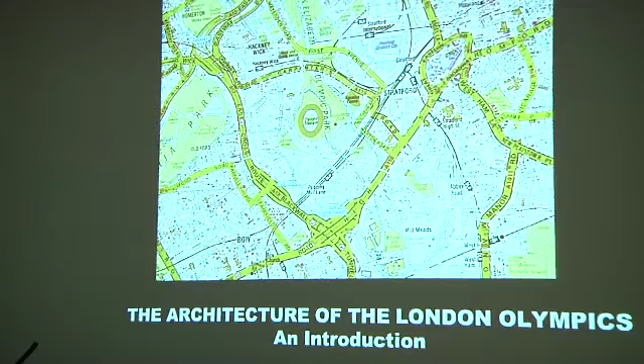It's not by chance that I start talking about the architecture, in inverted commas, of the Olympics, with a slide showing a piece of the A to Z, very familiar to everyone in this room, whether Londoners or newcomers. That immediately says something about the whole approach and what the story is about. The Olympics project in London is about creating a piece of city, and I'll come back to this slide at the very end.

Just notice the site, with all these yellow motorways and things around it - if you half close your eyes, or if you're at the back of the room, it maybe feels a little bit like the rest of London. That's not what it was like about 7 or 8 years ago when this project started.

And that really is the story in a nutshell: how do you go from this to where we are now, to where we might be in, say, 15 years or so from now? If we look carefully at this image, taken around 2005 when the bid was won, you can begin to see one or two really important things which any master planner, anyone interested in making a piece of city, would observe very carefully.

First of all, there's a massive transport hub buried somewhere there - I'll come back to that. Secondly, there's a large area of empty land. That's heaven if you want to develop, right? And with very few residential occupants.

A large amount of industry, which you see in the foreground, but also very importantly, you see way in the back, the Hackney Marshes - a series of green connected landscapes with water running through it, canals coming down, linking further south towards the River Thames. These are the ingredients of this project.

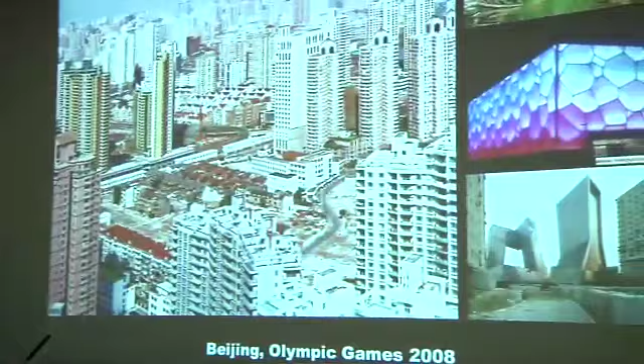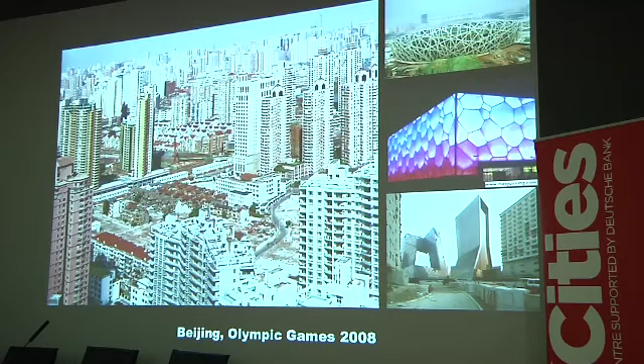And what it isn't is trying to do what Beijing did last time. Beijing needed to put itself on the map at many levels. It hadn't built a major stadium for about 40 or 50 years for 100,000 people, so it got Herzog and de Meuron, one of the best architects in the world, to build the Bird's Nest. But at the same time, they were building things like the CCTV headquarters, in order to make a statement about the new China, the new confidence.

What we also looked at carefully is what not to do. And it's a bit unfair to anyone who is close, as I am, to Greece—they're having a very tough time at the moment. But, you know, to design a Taekwondo stadium only for Taekwondo, very nicely designed, that no one can use after the games, that's what you get: a waste of infrastructure and a waste of investment.

So the idea was not to do that and to choose a site that was well connected and, as Ken Livingstone said, actually needed the money, the 9.3 billion, to actually do something to it.

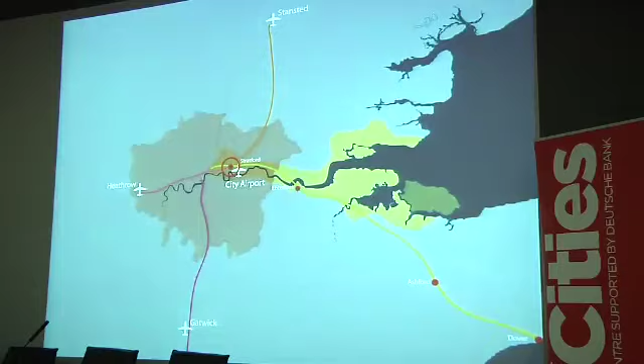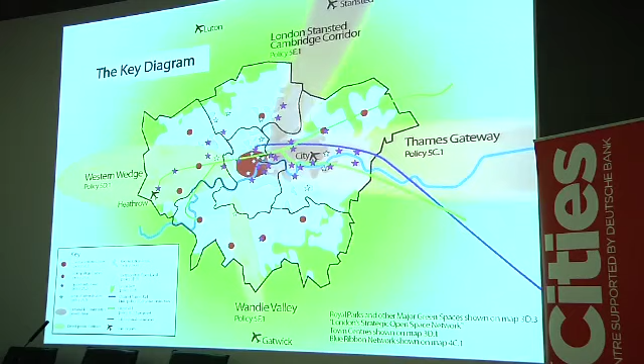And of course, these are the wards in the boroughs of Hackney, of Tower Hamlets, of Newham. And as Nick has already said—we don't have time to go into this—London policy, not just for the last 10, 15 years, but probably for the last 20, 30 years, has been trying to shift the emphasis of investment eastwards and northeastwards, in areas where there's a lot of land and the possibility of rebalancing the economy of London.

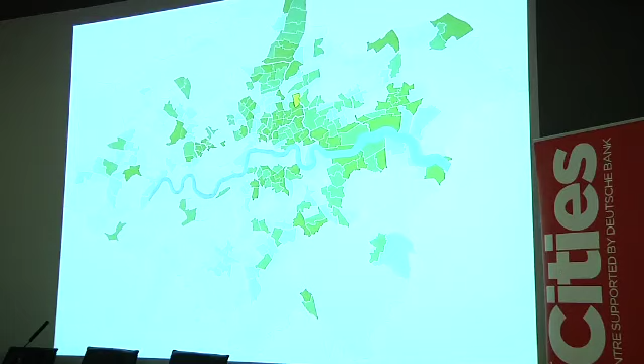What you see from this slide is that West London, the colours are slightly less dark, is much better off, less deprived than East London. That's the issue.

So what can an Olympics event do about that? Well, it's not an easy thing, and this is clearly what many of us have been trying to work on.

Well, the first thing, which is obvious, is that yes, the site of Stratford is in East London, but it's also one of the better connected hubs in London. I don't need to go into it in detail, but it's about 10, 15 minutes from many areas of what we consider to be central London.

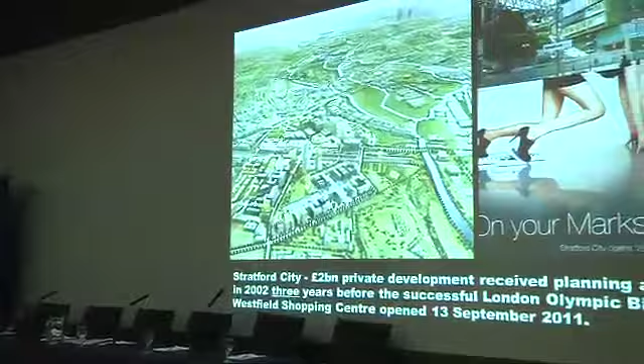So much so that a number of developers already in 2000 were eyeing the site as a lucrative place to build a new Canary Wharf, frankly. That's what was done. And we forget that in 2002, Nigel Hugill, one of the developers with Chelsfield, got planning permission for thousands of homes, a lot of development, and even a shopping centre.

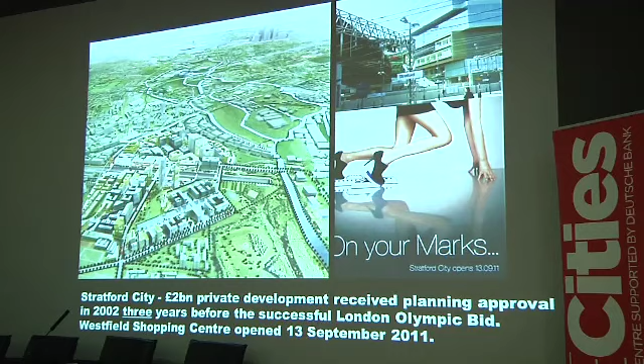And in 2011, as you know, Westfield East opened to—whether we like it or not, whether we like shopping centres, I don't particularly—but that is a place which actually now delivers something like 6,000 to 7,000 jobs to the area. So this is a piecemeal story I'm giving. Not everything was planned by one visionary master planner or by one visionary civic leader. It's very much the layers that Nick was talking about.

Just think of this in terms of scale.

That oval on the far right shows more or less the whole area of the Olympic sites. You can see the main stadium in white. If you go out of this building and walk all the way past the British Museum to King's Cross, that's the area we're talking about. Think how many things are there, how much housing, institutions, public and private scenarios, parks and spaces. That's the complexity that has been realized here.

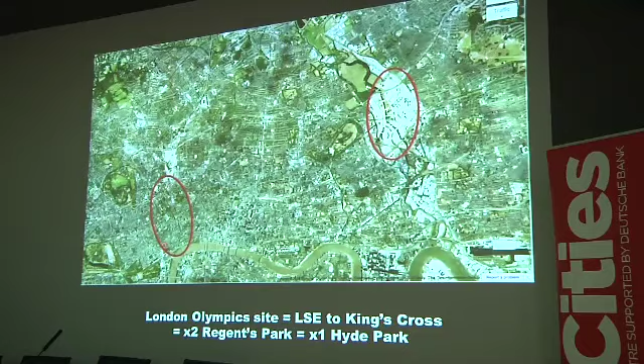And it's built on these very simple principles which I will now describe. The first thing, London is moving east. I've already described that. The second thing, there's this extraordinary connection, which Stephen Witherford and others have talked a lot about, of bringing nature into the city.

There's that green strip with water and parks, which takes us all the way up a corridor to the north of London, and comes down with its waterways to meet the River Thames. But what you also see here is this combination of romantic scenery in the middle of the city, but also with electricity pylons, because this has been for hundreds of years the backwater of London.

To move electricity pylons costs £200 to £300 million. How are you going to do that? You win the Olympics and spend some of that budget. That's basically what Ken Livingstone said. He didn't get elected as a result, but there we go.

Other things which are clearly important to this discussion are not just the physical infrastructure, but the human infrastructure, the very vibrant communities of waves of immigration from all over the world that inhabit the areas at 360 degrees around the site. But this is what the area actually looked like only a few years ago.

These are the organizations that were involved. We don't have time to go through that. But the important thing is that the land is actually owned effectively on behalf of us, on behalf of Londoners, on behalf of the taxpayer, by the mayor's organization, which Andy Altman is the chief executive. And it sits across the 4 boroughs that you see there. I'm sure we'll have a chance to talk about that.

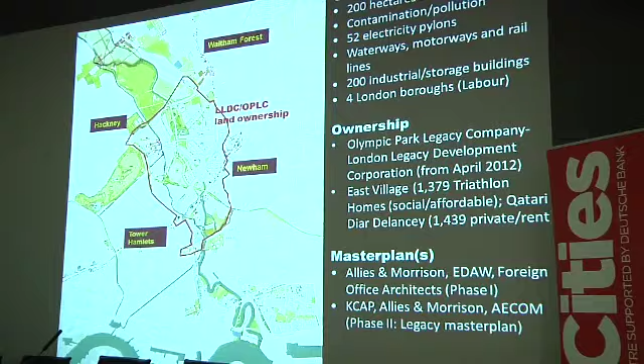Now, just a small anecdote before I present the master plan and move on to the other presentations. The Brits win Olympics in sports when they're sitting down. I don't know if you knew that, but they win medals in rowing, horseback riding, sailing, and cycling. So might as well build buildings for the next generation of those who are going to win medals. Now, that's a sort of joke, but it's really about thinking of legacy all the way around.

You know, what is it we need in London, and where is that investment being made? Now, Nick and myself and many others worked on a series of competitions for the Olympic Delivery Authority on all these venues that you see there.

And it was based on this very simple idea that the master planners came up with. The event is a closed event for 2 weeks, but then it needs to go back and become part of the city. This is how architects like to represent the same idea. Very simple, very powerful: restitch the communities and the fabric around it.

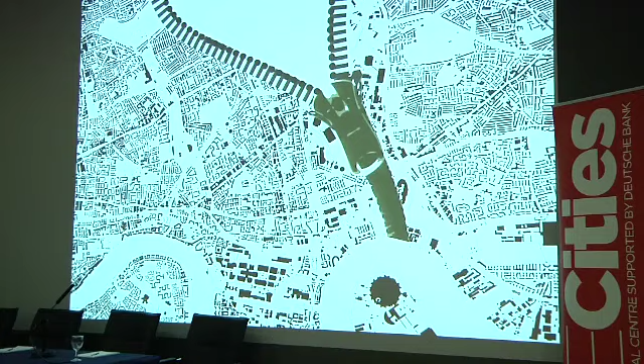So here's how it actually works. There is already a fantastic network of water and green. So take the wider site. Over there is the main station, International Station of Stratford. This is the major shopping center over here, surrounded by all these roads and motorways and everything else.

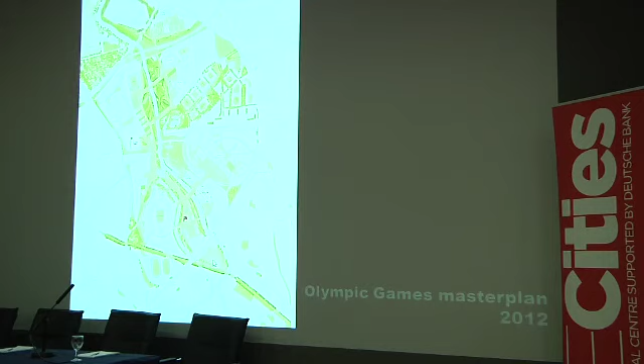But at the heart of it is the possibility of a great park, the Queen Elizabeth Park. That's what it looks like, the slightly romanticized view, but that's actually what it feels like when you're there. You can see that it was taken a few months ago because the orbit wasn't completed, and that's a view from above. The second thing is take this area and connect it.

There was only one road actually going through it. So there have been a number of investments made in physical infrastructure, bridges, walkways, and other things, connecting the site, particularly east and west, very difficult to the north and pretty tough on the south. That's why you see from this image bridges cutting across the waters, flying over the canals and the connections. You also see an important point at the bottom, that the bridges are designed for the Olympic Games, very wide, 50 meters wide.

The idea is to take maybe 100,000 people without any crushing, but the bit nearer to you is taken away so you get a reduced bridge. That costs more money, but it avoids an overscaled, banal and empty space for the community that remains.

The other thing is around the transport hub: do two things, create jobs—Andy will talk about that—and build houses. This is what the Olympic Village is beginning to look like. Half of it is roughly social and affordable housing, and half has just been bought by a private consortium for housing for rent. The other big issue being decided now is the future of the press center, which will create jobs on the top left of the site.

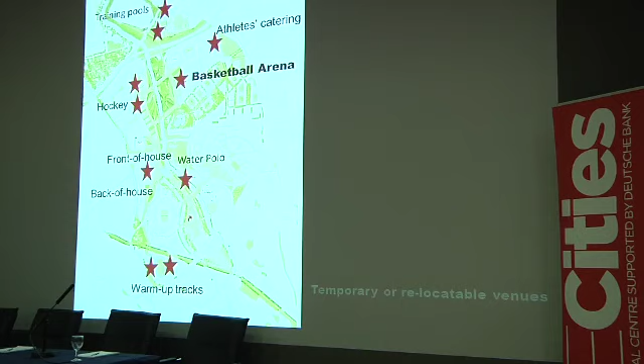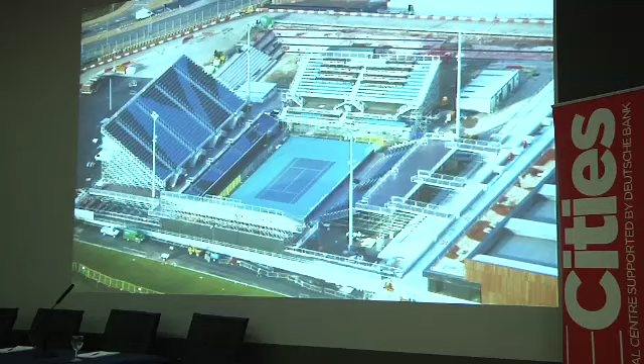So the idea is you've cleaned up the land, created the infrastructure, built all the things you don't need as temporary, designed so they can be moved on or relocated. There's a hockey stadium—just move it on or sell it to someone else. When you take it away, you have land that's been cleaned up, accessible, and provides the opportunity for housing. The other thing is keep the things you actually need.

London, bizarrely, has not had an Olympic-sized swimming pool for many years—the one that was there wasn't up to standards, so that's the Zaha Hadid scheme there. We don't have a velodrome in London, even though we're winning medals, so that's another permanent structure. Not to mention housing, of which there is enormous need in London, and the other structures you see. So only a few are actually permanent, and that's one of them.

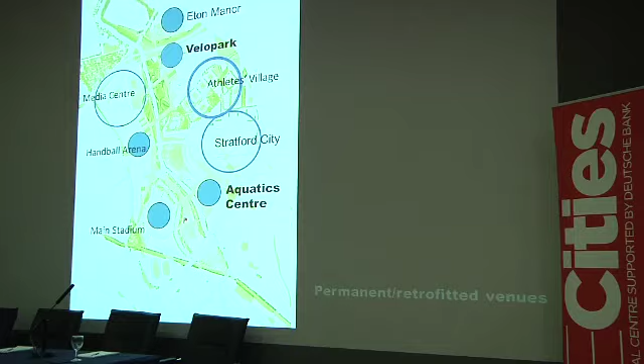Now you see the three buildings which will be presented by the architects after me. This is the most important slide of the whole presentation, because it shows what happens after 2013. It shows where there were stadia, where there were temporary things—basically pinkish, purplish empty areas. That's where Andy Altman and his team will be developing competitions, bringing in the market for mixed neighborhoods with housing, schools, and other facilities—building on the DNA of what has been there. That's what this master plan is really about.

It extends its tentacles outwards, not because that's automatically going to create a happy community in East London—we're not that naive. But what it can possibly do is create the physical infrastructure which can support the diversity and complexity that cities need. Add to that schools, energy, and health centers, which I think are part of the picture.

Let me end with three slides where effectively I started. If you looked at the A to Z in 2005, you would find this: there's the big ring road, there's only one road, Carpenter's Road, which cuts across the site. The rest is more or less empty, as you see, though of course there was industry and other activities.

If you looked at a map today, 2012, this is what it would look like—but of course you can't get into it because it's behind a security fence. The most important thing is to go back to what I showed you at the beginning: use the elements, the infrastructure, the strategy—both political and physical—of creating something that can grow and change over time, to create a piece of city which builds on the venues, parks and spaces that we'll now hear about. Thanks very much.

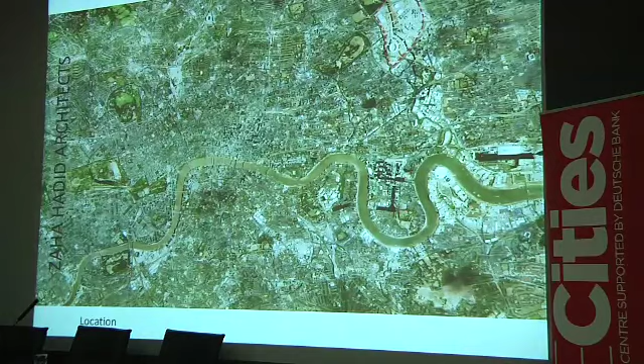I believe we were the first architects appointed, initially for the LDA. We won a competition in 2004, thankful to Ricky, who was on the jury, as well as a couple of others. For us it's been 8 years working on this project, and it's a project where the parameters on some aspects have evolved.

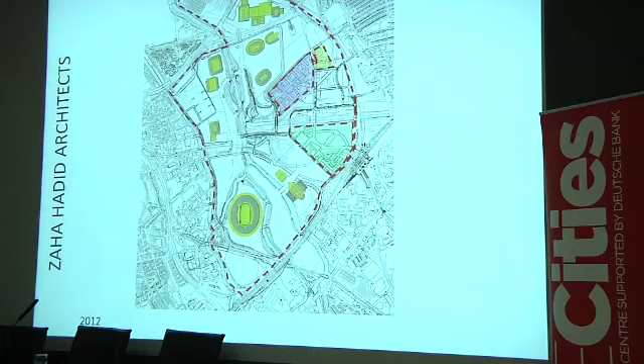The master plan has changed quite considerably in some aspects, but throughout there have been core issues that have been kept. We keep coming back to this core idea that Ricky outlined: first you establish what you need for the next 30 to 50 to 100 years, you build that in a permanent manner, and then you adjust it to hold the games, which are temporary. That was there for us in the brief.

I'll skip through these slides because Ricky's already done them. We won the competition in 2004 with this design. I suppose it's a mix of what Ricky was outlining in Beijing - a very, very large architectural statement.

But it also had the idea that the seating needed for the aquatics, for the Olympics, should be demountable. This was there from the very beginning - that those seats should be demountable, so that you have a seating capacity. What the IOC is looking for is 17,500 seats, a mixture of public and media, and after the games you would demount them and leave a venue focused on swimming.

That went back to the core idea Sebastian Coe outlined in Singapore, that these games should be about getting people to participate in sport. A bit like Ricky's analogy that we only win medals sitting down - it's actually to try and get everyone out there, to encourage everyday use and enjoyment and involvement in sport.

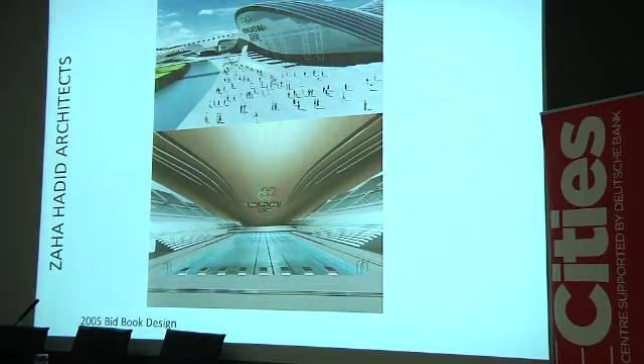So for us, we tried to create a building that was very fluid and open, a pavilion within the park, very transparent, that would encourage people to come in and use the swimming pools, and that could be adapted to be used for the Olympic Games.

We've gone through a lot of iterations, but we have retained the core design that we showed to the IOC in 2005.

We won the competition, and Zaha and the team presented to the IOC when they came to London to assess the London bid. We presented the image you see at the top, and they were very happy, very happy with this plan you see on the right-hand side.

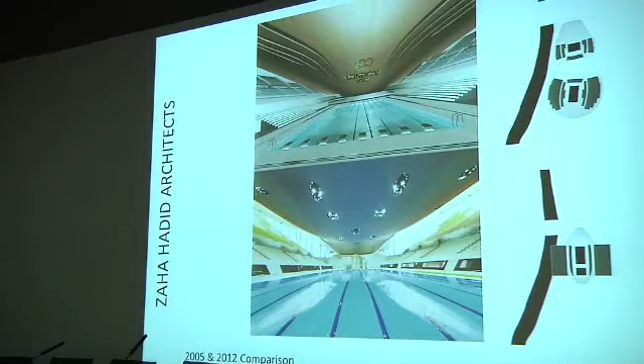But of course, once we won the bid, we went into a period where we weren't directly involved, and EDAW, the master planners, working with the LDA, really started to interrogate the master plan and drive in the idea that you leave behind only what you need.

That came back to us as a brief in 2006 to really reduce the building and expand it in a much more pragmatic way - to cut down the architectural statement, cut down the overall volume, modify it to make it more compact, and work with other elements that needed to be built.

So you ended up with a very compact building that's left, and that has loads of benefits, but primarily in terms of energy - it's a smaller volume and it's easier to maintain as a venue.

But as a core internal field of play, from the top to the bottom, I think you can see that we have delivered what we showed the IOC in 2005 - that fluid type of space in the interior with this kind of dynamic seating expansion.

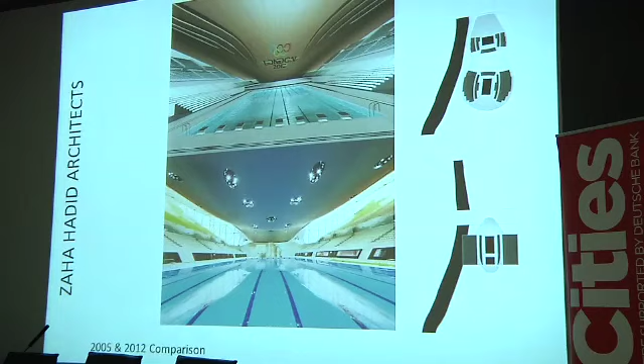To do that, we switched from the top image, where initially we had the idea that the permanent roof would float over the temporary stands. That is the permanent roof - it's doing a very large cross span as well as a span in the long direction, and then we fitted these temporary stands underneath the permanent roof.

And what we've built is to reduce the permanent roof to what we need for legacy. What we call legacy is what remains after the Olympic Games, which is going to be there forever, hopefully, and to add on these two temporary stands.

I think it should be noted that putting those pylons underground and making a site like this work is actually very difficult. These are brownfield sites which are contaminated, and this site in particular is beside a river, so it has a very high water table. So when you're trying to dig down, the water is pushing up against it, meaning you have to put a lot more energy and structure in to make a building work in this condition.

Beneath the permanent roof's structural support points is where the tunnels for those pylons were taken off the skyline of London, which is actually a fantastic benefit. Anybody who knew the East End before knows these pylons were kind of an ugly remnant of the industrial past in that area, and putting them into tunnels goes well beyond the red line boundary of our site. But the impact for us was that we had to create a very complex foundation over the tunnels. You don't see all of that, and you shouldn't, but it should be appreciated that it takes that level of intensity and structure to make it work.

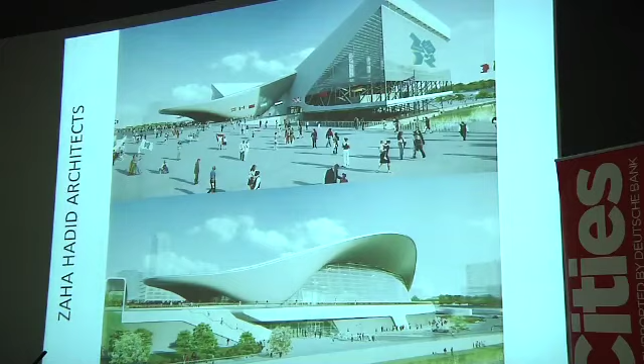And to achieve that within the parameters of a construction program where the contractor had to finish on a deadline was quite a remarkable achievement for the contractor we were working with, and across the park. You always have accidents on projects, you always have mistakes, and it requires a substantial team effort to rejig the program to correct those mistakes and ensure you have the overall quality at the end.

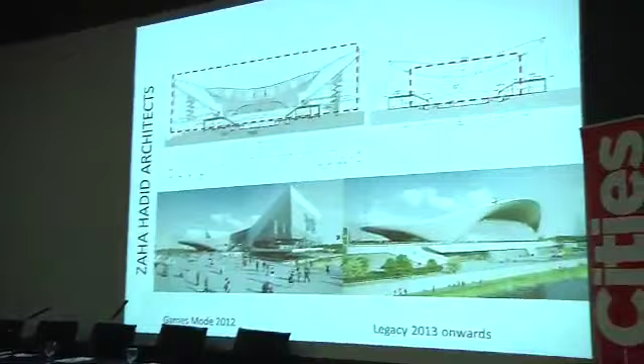In terms of the overall volume, the top part of the slide gives you a sense of the total red box, which is what you need for the games, and the smaller red box on the right-hand side is what we will leave behind. There's obviously clear differences in terms of the amount of energy required to heat one, and the scale of maintaining one compared to the other.

And it's almost a 50% reduction in the building.

It's quite a clear different strategy to Beijing, which almost built that red box for the Olympic Games for their water cube. So for us, we have been really pushing down the permanent roof to compress the space as much as possible, and you can do that while still maintaining the sight lines onto the field of play. So you're not impacting on the functionality of the venue for the Olympics, except that when you're sitting on that side, you cannot get a direct view across to the other spectator seating, which is unique. But we actually think it will add to the intensity of the atmosphere because you're really focused onto the field of play.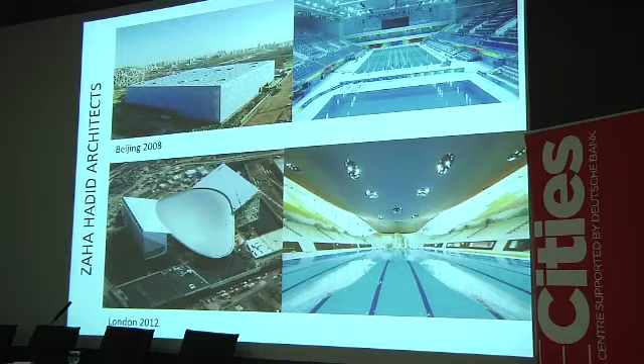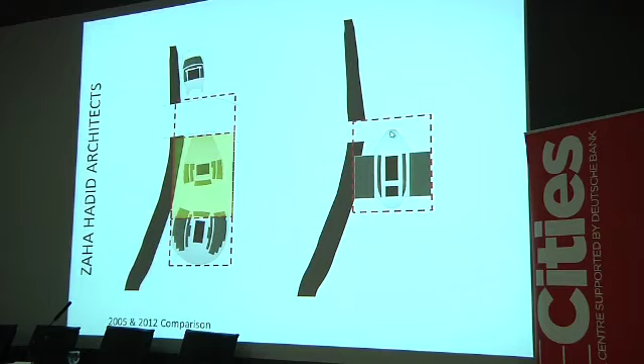When you look at the overall footprint of the building, we've done a similar exercise. So what you have on this side is the scale of the original footprint that we did when we weren't engaged with the client. It's quite common that when you're an architect and you get a brief and you don't have a dialogue, you just do the work. But you can see we've put one of the swimming pools underneath a bridge, halved the size of the permanent roof, and really rationalized the temporary stands. All of that allows us to free up more site, which will become development plots to the north and south of this venue.

So a lot of work has gone into designing this building in a way that leaves enough space around it, which buildings can be developed afterwards.

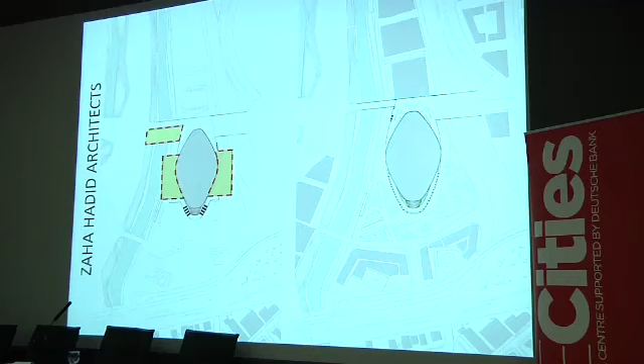And a lot of work has gone into incorporating that swimming pool. This is a training pool. These two pools are the competition pools, so this is what you'll see in the Olympic Games. But this is the training pool that's necessary, and because we put it underneath the bridge, there was actually a concern, and it was really the challenge to us to make that space under the bridge habitable in a pleasant way. So we used the depth of the structure there to integrate lighting and other technical issues to create quite a diffuse, and we think quite a pleasant space, which nobody would feel or think initially is underneath a bridge.

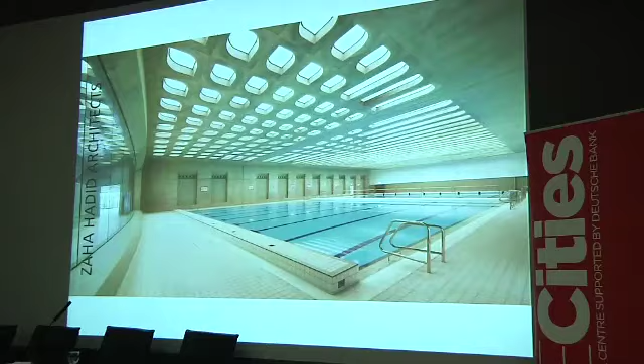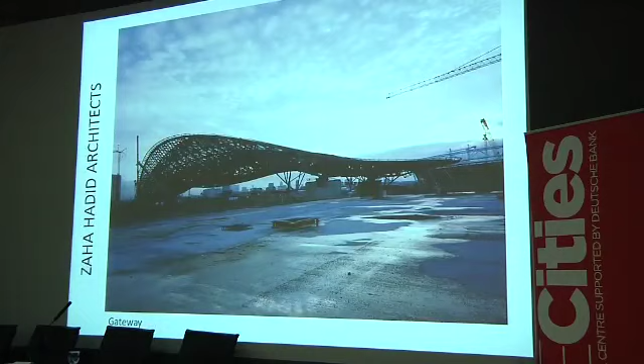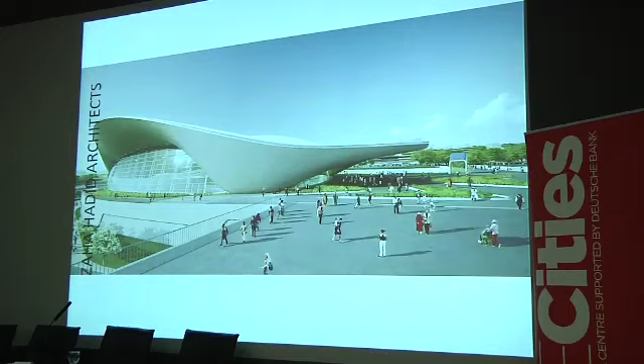To come back to the overall main statement of the building in legacy after the Games, it's principally the roof, where you can see this form just during construction and how it will be afterwards. We decided to clad it all in timber so that when you're close up you get a scale, and then as you step back, you get the more monolithic feeling of the roof. And clearly the form is being manipulated - for us, manipulating the roof form is all about making the building work easier, and to encapsulate those core aspirations from the client.

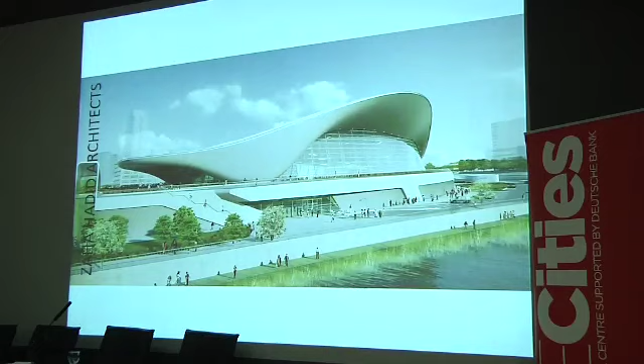So this idea of encouraging people to use the venue - it's obviously necessary to have it transparent and open, so it encourages people to come into the building, encourages the park to come around it, and to have multiple entrances. This is an entrance on the riverside, which would be the principal entrance into the venue, and really to develop a language that fits into the wider park language. So although part of this building is iconic, it really fits in.

I think this gives you a sense of the complexity and the quality that was achieved in a very tight time frame, and I know nobody believes us, but there was actually a lot of what we call value engineering - that is, looking to make savings so that you can spend money elsewhere.

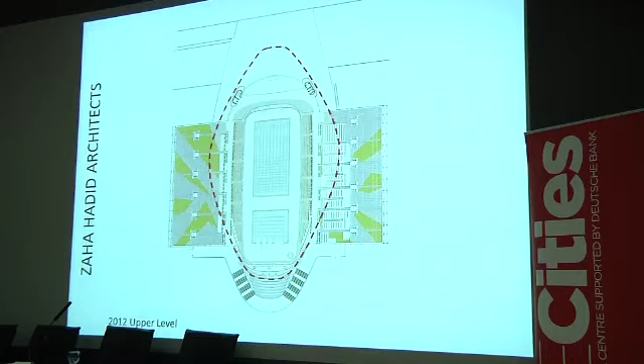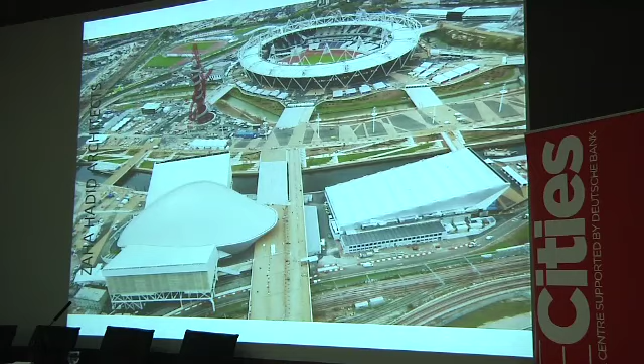This is the plan in Games mode, just to go through it quickly to show you. Obviously it's quite different, but it is a necessary compromise - a compromise that we as architects fully embrace, and we fully worked to make as cost effective as possible so that you could spend the money elsewhere on the permanent build. And we're only recently now starting to think and getting engaged with the LLDC and Balfour Beatty to think about converting this building after the Games to its legacy.

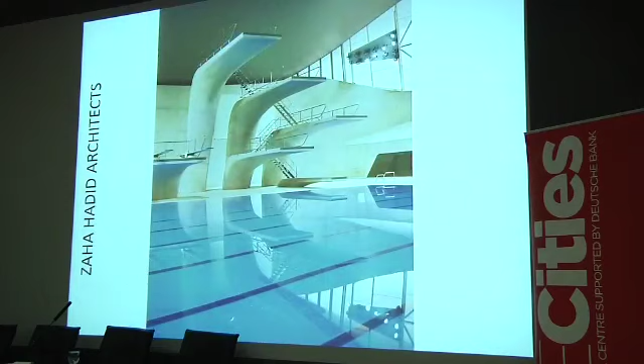But actually for the Olympics, I think it's a very bright, vibrant and dynamic field of play, and this will be the image and some of the views from the seats, where you get this kind of intensity onto the field of play. And thankfully, the client, the ODA, really saw the diving boards as a moment where you could do something quite sculptural as a focus piece. And I think we're all quite happy.

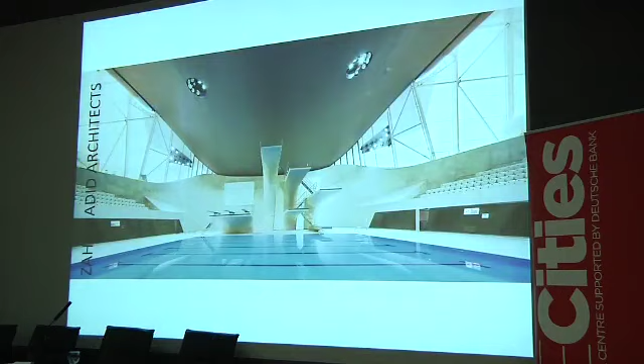Just an overview, and hopefully Tom will have a good Games, and then we'll all be happy. I'm just going to hand over to Jim.

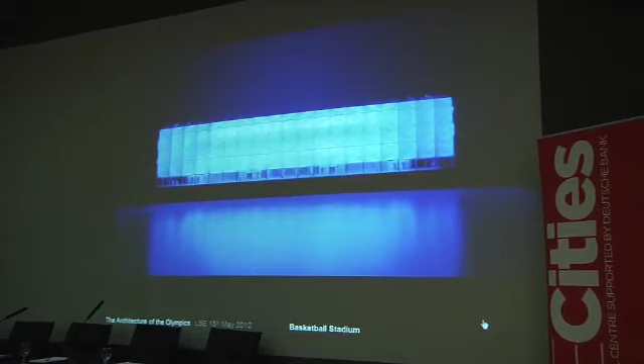Doing a temporary building gives one a slightly different take on the approach to architecture. So I'm going to talk about the basketball stadium, which went through various iterations during the design process, and various frustrations, of course - like many projects, there are frustrations.

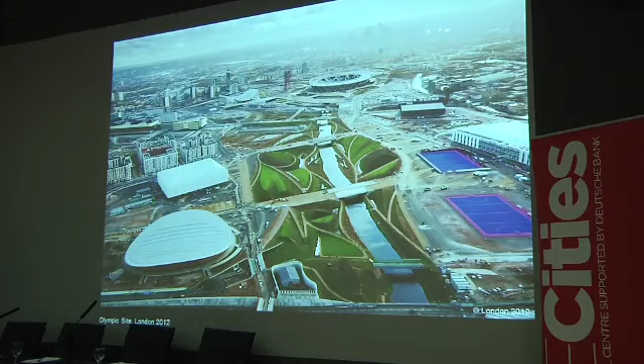To a certain extent, there was an aspiration in the architectural brief that had a sort of equal and opposite force from the financial constraints of the project, so one couldn't do absolutely everything we'd hoped. You know where the basketball stadium is - it's the rectangular white box. I'll talk a little about the design development and then show you the final scheme as it happened.

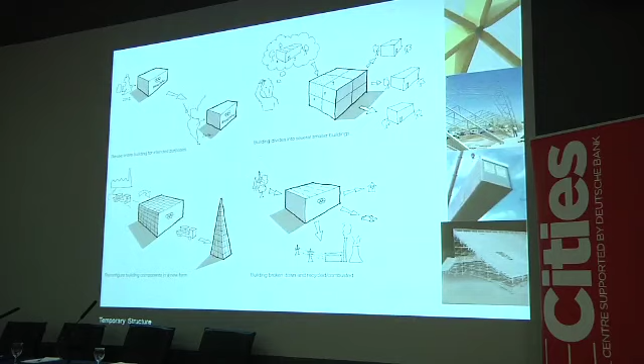Top right, maybe the building could be designed so it could become a series of sports halls for schools, say. Bottom left, you could reconfigure it into a completely different form - it probably wouldn't be a little pyramid like that. Or bottom right, it just gets broken down and recycled, or burnt to make energy. So it could have been any of those things.

As we got into it and developed the design, the first thing that happened was that the stadium moved from where we thought it was going to be - it moved to a different site. We looked at all sorts of options during the early stage of the design: steel, wood, cables, even softwood structures. There are different forms of structure, many different ways, and they're surprisingly well matched in terms of economics.

Those little section diagrams are quite significant too, because normally with a big stadium or arena like this, with 12,000 seats, you'd like to get in about halfway up, just below halfway, to get the easiest distribution into the seats. One way of doing that is to sink it down into the ground.

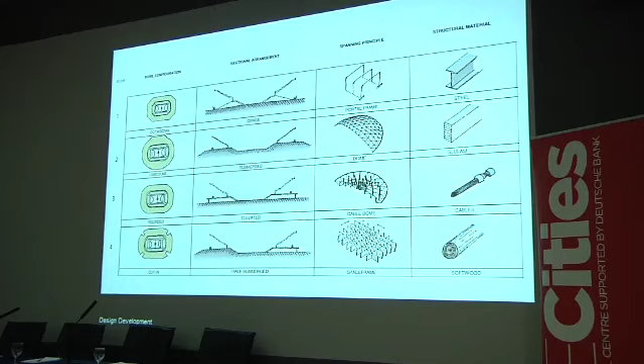We couldn't do that because of the legacy use - the earth had been repaired. There was a soil hospital on site; the earth had been contaminated and had to be repaired. So the last thing we wanted to do was dig down into it, and then have to fill it all up again afterwards. You'll see how the design evolved to respond to that.

So here's some images of some of those options.

Top left is quite close to what actually happened. Top right was a scheme that we were pushing quite hard for. We really liked the idea that you could build this sort of geodesic structure, Buckminster Fuller, you've probably heard of, where every member would fit in a container, and then it could be taken abroad and, in just a handful of containers, be reused somewhere else. I won't talk about the others particularly because there's a lot to get through.

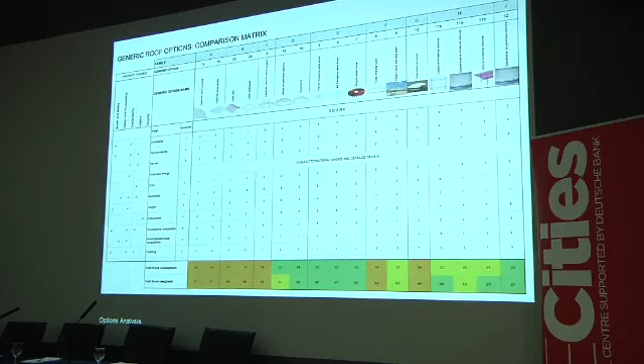But we were very analytical, perhaps more analytical than we normally are as architects. We normally try and decide what we actually want and then go for it. But this time, we really went for it with the engineers, SKM, and looked at every single criteria we could think of, and every kind of structure we could think of, and scored them. Now, we can't go into it, but green is good, and orange is bad.

And we did the same thing for the way that the building would be clad. What are all the different ways of doing it? Now, curiously, the way that it actually is clad didn't appear on this particular thing. So we thought that the PVC that was available at the time was not suitable. But eventually, a good PVC was found that could be recycled. So there's just some views of it.

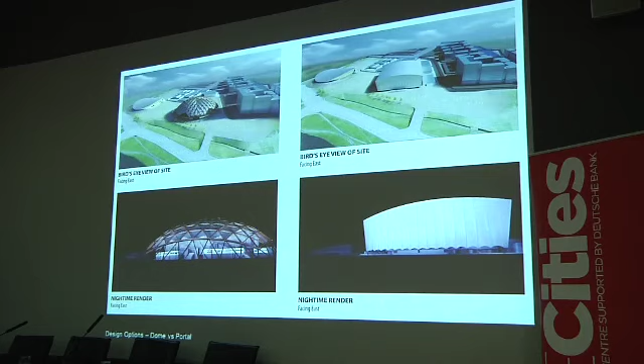Now, what was happening - I won't talk about all the politics of it - but there was a fear with the financial pressure that the building, which had to be a big black box internally, blacked out, would just end up being incredibly simple on the outside. So what we were showing on the right there is what we all called the plain vanilla. And I think there was a general acceptance, even amongst the cost people, that this was not acceptable. It's a very big building on a very prominent part of the site.

So it kind of moved along. We carried these two schemes on through the design process. The dome, I think people were worried about because they weren't familiar with it. I was quite excited about it as a potential structure which created quite a lot of space around the edges, which I think would have been quite useful, especially if it rains. Well, we hope it doesn't.

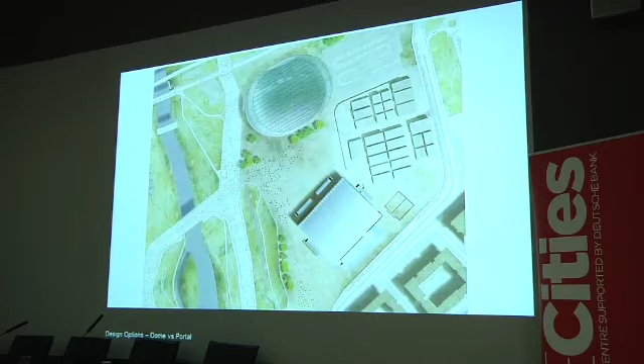This slide, I think, illustrates that. So in fact, it gets much tighter with the fabric-clad simple structure. And then just these two slides show you, it's next to the Velodrome, which you'll hear about in a minute. That's the plain vanilla box, and that's the dome form. So they're pretty similar, really, in terms of the amount of space that they occupy.

So after that, we really - what happened was - it was told, no dome. It's not going to be a dome. So, okay, I didn't walk off in a huff because, you know, one likes to - it's a challenge. You have to keep going and get something that really works.

So we started looking at ways that we could clad these enormous facades. I mean, they're sort of 110 meters long, main facade, 110 meters by 24 meters high. So it's very, very big. I mean, it's about the size of Tate Modern. If you're looking across the river, it's that sort of scale.

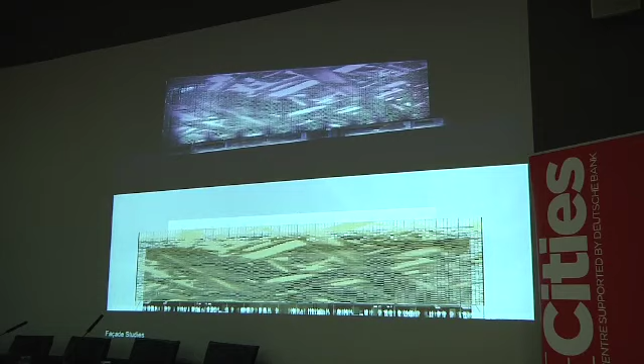So we looked at this idea that I had that you could transpose an image onto it, and the way that one might do that is by using thousands of pieces of timber planks, and just altering the spacing between the planks slightly to reproduce an image. And we were just experimenting with grass, and then here was another one where you have a face, but on that scale it looks as if it would be something quite interesting.

That proved quite scary as well. But I think it was interesting. But again, one felt knocked back. But actually, again, we don't give up. We don't give up. We've got to get something good out of it.

And this is the final scheme with some slight adjustments. And what you see is you see it sort of exploded there, and it's quite a good way of showing it in a way, because it's actually owned and procured in that way. So different people own different parts of the building, and that pretty much reflects how it is built.

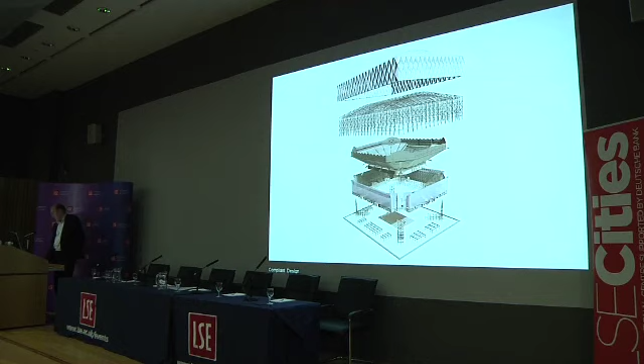So I'll talk about just firstly the structure. Big steel, very simple, lightweight frame. So it's 1,000 tons for 9,900 square meters. So it's a big volume. I think it's 300,000 cubic meters of space.

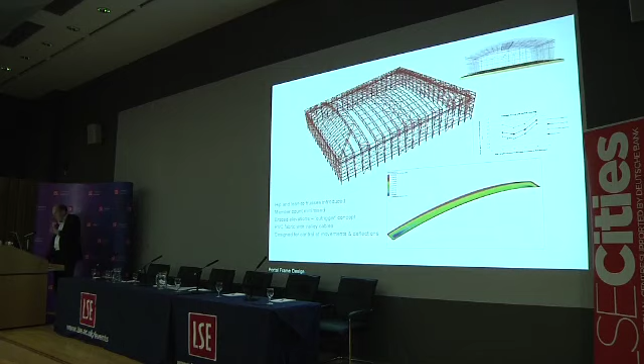You can easily get jumbo jets in there. So very lightweight. It's got this sort of hipped ends, so we get a constant eaves line all the way around the building, which I think makes it easier to deal with architecturally.

I won't bore you to death with the foundations, but there is something quite interesting about them. Because it's a temporary building, we didn't want to put lots of piles in the ground that had to be pulled out, because there's going to be housing on this site afterwards.

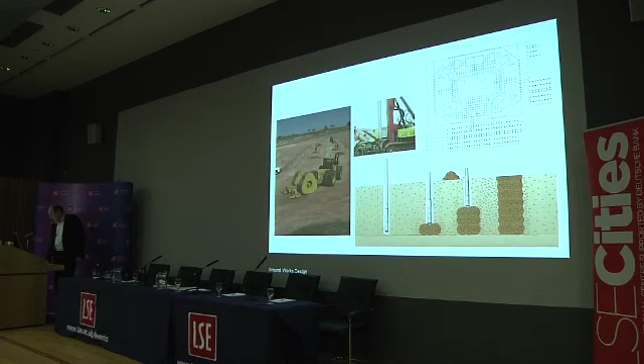So the engineers, SKM, worked out this way of drilling down into the soil, putting rocks in, and using that as a base that's strong enough to hold up the building. So when the building goes away, there's nothing in the way, nothing that really needs to be removed, with the one exception being the field of play, which has to be a much more stable and strong piece of concrete.

They're moulded seats, pretty standard, supported on a scaffolding frame. It's all totally normal in a sense for a temporary building. The scaffolding just goes down to the ground and sits on plates. You'd be surprised how many people you can support on that kind of arrangement.

Seating, we also—because there's a lot of changeover with basketball, you have a match, then people go, and another lot come in—there'll be periods when there aren't very many people in the stadium for short periods. We had this idea that we could create a pattern out of the seating, do something interesting. What evolved was using the logo, and I think it's been rolled out onto a number of the other venues. So we've got orange and black in ours.

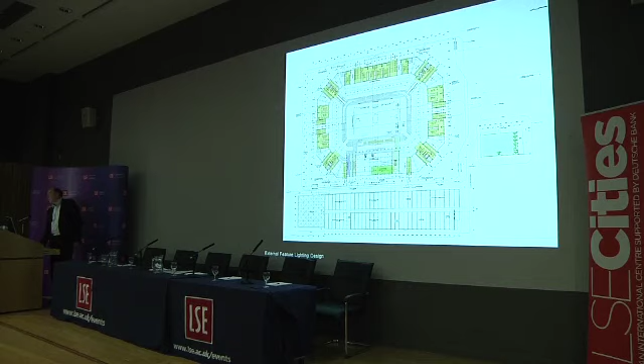The actual plan—I said before—we had to get as much as we could out from underneath this building to minimise the structures, the cost of putting it in, and the complexity. So a lot of the backup athletes' facilities are off to the side here in this building, which is a single-storey building. So only the loos, the stairs, and the odd lift are actually tucked in underneath the seating.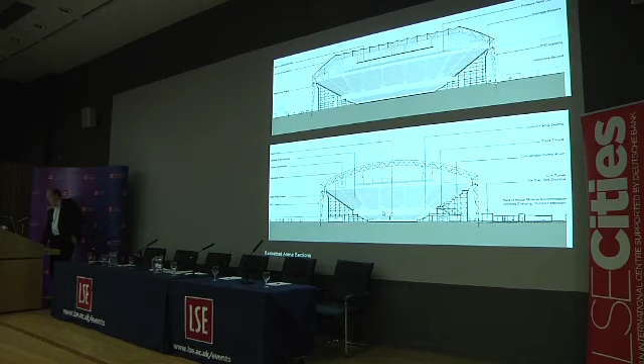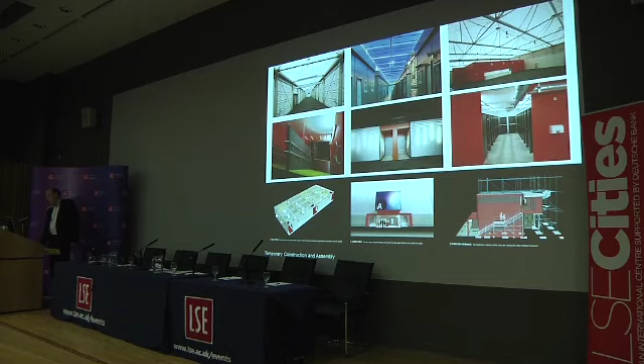Those various elements are done very simply. Some of it's off-the-shelf temporary structure, some of it's just brightly coloured, some of it's super graphics, but all things that are relatively standard and can be removed and reused.

You get a relatively small gap between the outside of the building and what's called the wrap here, just about 5 meters or so. But really that's all that's needed. It just means there's no space to wait.

And then lighting, as I said at the beginning, I think it's a televisual event. I do think that rather like Aquatics at Beijing, we constantly saw it on the TV. Maybe we'll see this building. I think basketball is primetime American, so it'll be at night. I think quite a lot of it will be at night.

And there will be an interesting lighting scheme which has been developed by an outfit called United Visual Artists. I haven't seen it yet, but we're looking forward to seeing it. Thank you.

Thanks very much. My name's Mike Taylor. I'm an architect, work at Hopkins Architects, and with a team with some fantastic engineers, we worked on the Velodrome.

Those stats at the bottom of that page tell you how terrifying it was to design a building for those athletes. You have a weird paradox in that cycling is the most successful sport in Britain. Most of you in this room have probably never seen a race, let alone a velodrome or a track. So we had the honour of designing a velodrome for London, bringing the sport to the capital, and doing something worthy of the athletes.

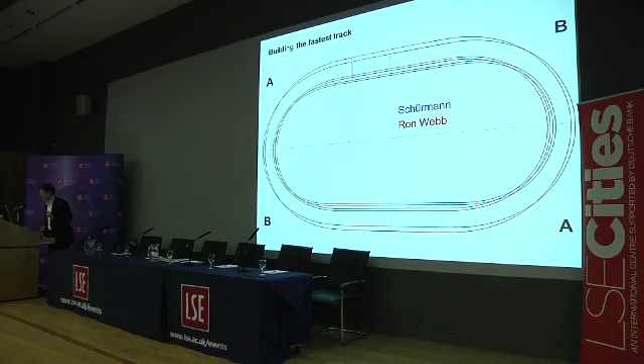So you start with your carpenters. In eight weeks, they lay on these timber laths, 40 millimetres by 40 millimetres, nailed on by hand. Ron won't let anyone use a nail gun or anything like that. And you create this absolutely beautiful surface.

It's a living thing, it moves, it's got no joints in it. The outside is about 75 metres longer than the inside, so when the humidity changes, it starts to flex.

So that's the track. We knew we had a fantastic track. The next thing we could influence would be temperature and conditions. All venues want fast tracks. London wants world records, and actually the cyclists like the venue very, very hot. The hotter it is, the thinner the air is, and they go faster. They literally will sit there with their laptops in training, calculating humidity and temperature and equating it back to world record speeds. So we had to make this venue as hot as possible.

If you're going at 50 kilometres an hour on a bike, you're not bothered about the temperature because you've got wind on you. If you're sat in the crowd, meanwhile, it's a different matter, and there's a fair chance that in July we might get some warm weather. So we had to balance spectator comfort and ensure the track was very hot.

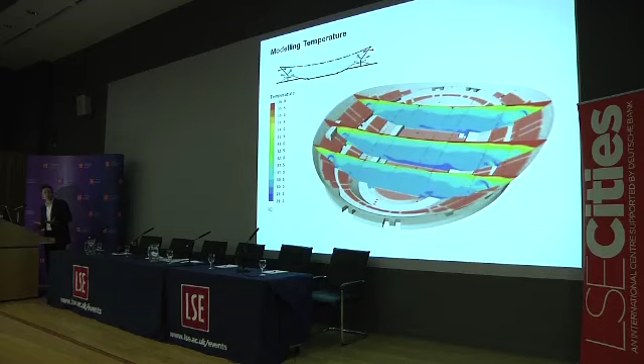But we couldn't have drafts. We couldn't slow the cyclists down because it's not fair on individual competitors to have air movement. So it's a real challenge. With BDSP engineers, we worked very hard, and what we came up with in the end was a very highly insulated building, very tight control on all the doors and ventilation, and underfloor heating which could be cranked up before the event, and then a booster system of plant which we could heat the air and blow into the space.

And on the outside of the building, which you might recognise, we've got little gills like on a fish in a way. This building breathes. It can be naturally ventilated, or when it's being mechanically ventilated, air can be sucked in at the bottom and blown out at the top. So hopefully we'd sorted the temperature problem out.

The next thing we could influence was crowd, and we were very lucky because we had Chris Hoy on the jury, and we got very good advice from him. He was describing how you go around the track, you're straining away, it's agony, the crowd are really cheering you on, and then you go down the home straight where the IOC officials, the competitors' families, the judges are, and it's dead silence. So we said, okay, what can we do about that?

We said we'll try and wrap the crowd right around the track, move the officials and the press and all these quiet people as high up as possible, and get a wall of sound.

And the cycle track banking, as you might have noticed, is very steep - it's 42 degrees. The seats could only be 34 degrees. So normally in a velodrome, you have no seats around the bends because you can't really see. We insisted on putting some seats around the bend just to keep that crowd going round.

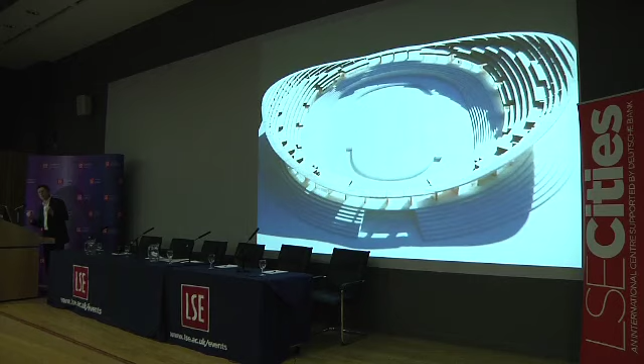And then tucked up high, the majority tucked up into the roof on this project - and I'll explain why later - with good views. That shape developed, and we were really keen to get the crowd as close to the athletes as possible. So it's a very small venue, very tight, with hard surfaces, and we really pumped up the acoustics for maximum effect.

So we finished the building in February 2011. They rode round, they were very excited. And then in February 2012, there was a test event, some of you may have been - it was a World Cup, so it was a proper event. It was a qualification event for the Olympics, so the athletes were really trying. And that was very successful.

There should be a movie here now.

And Chris went his fastest ever in that event, and came away really buzzing. So we had three world records for a World Cup, which is fantastic. Hopefully we've done a great job on the field of play - we've got a fast track. London should be a big success. I have to say the UCI have changed all the rules, so we can't possibly win as many medals as we won in Beijing.

But that's not enough really for an Olympics, is it? I mean, it's the greatest show on earth. It's a massive televisual event, and I think this building is probably the most successful television building in the history of mankind. It was absolutely extraordinary to look at.

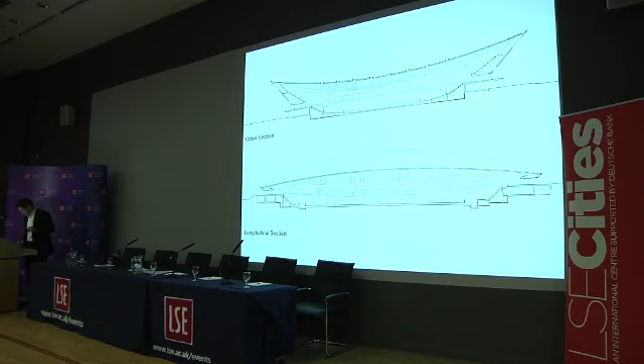And that gave us something which is very useful to architects and engineers. It gave us a double curvature, which is very strong and therefore very efficient. And from that shape, we built this roller coaster. Actually the beam at the top is a recycled gas pipe from the American oil industry, which we're very proud of. And that was the most efficient shape.

You see the seats going on in the background, being laid on by precast. And what was exciting about that was the track sits in the middle with this beautiful geometry. The seats are very tight around the track, and then this wrapper, this envelope, is very tight around the seats. And that could communicate the geometry of the track through to the outside of the building, and hopefully we could pick up the dynamism of the track on the outside, albeit it's rotated because the crowd are on the side.

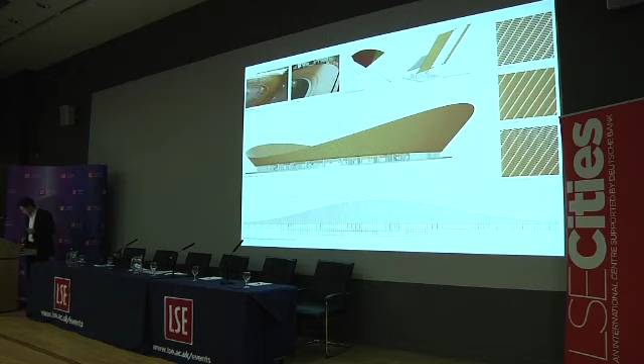But that wasn't quite enough. We wanted to really push this idea of efficiency. So we challenged ourselves. We said, well, you look at a bicycle, it's probably the greatest ever invention. It's so efficient. Could we make architecture and engineering anywhere near as efficient as a bicycle? That's Victoria Pendleton's sprint bike, so it's a slightly unusual one.

So we set ourselves that challenge. Could we make the roof so incredibly light that it was like the spokes on the finest wheel? And so we worked very closely with the engineers, and in the end we could span this structure, which is 130 meters, with just 36 millimeter cables by locking it into the structure and everything else.

These are the cables laid out in Germany, being stretched. There should be another little movie now. Oh dear, I'll pass on that because I know time's limited.

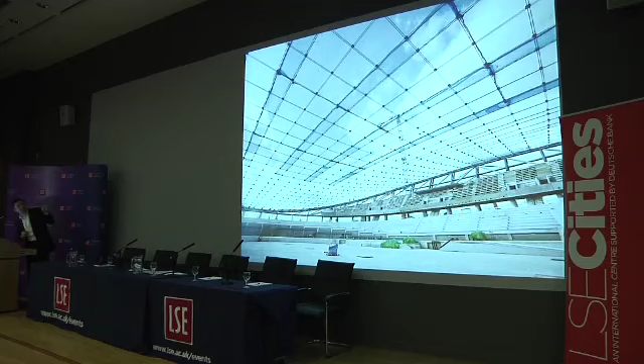They had a little movie of this cable net going up, and it's the most amazing thing because without any scaffolding, you could lay these cables on the ground and tension them up onto that ring beam you saw, and pull it into place. The net result is this amazing sort of form of pure structure. Those are just the cables with nodes which link them together, on top of which is a safety net. So very quick, very cheap, low carbon, very low risk health and safety wise because there's no scaffolding, no one working at height. That really was like 1972, the Munich Olympics, which had a beautiful cable net structure.

They had perspex on top because it was a cover in a park. We'd already established we needed really good insulation on this venue to keep the temperature up and make it cheap to run afterwards. So we devised a series of panels which just dropped on, and that formed us a very cheap roof. Everything's simple materials, plywood, dropped on, with movement joints because the thing moves up and down a bit, very lightweight, very efficient. When we put some timber on the outside, that gave what's now known as the Pringle.

So very logical, and hopefully a sort of form that's distinctive, very much London, came out of that ethos, and can stand proud next to Beijing in its own way.

When you measure up, Beijing had 85 kilograms per square metre of steel in the roof. Sydney was 55, with a slightly smaller span. Athens looks efficient, but those tubes have got enormous amounts of steel in, 250 kilograms, and we were down at 30 kilograms. So on a purely mathematical basis, we were very tight.

Very importantly, what about afterwards? We branded this idea that the Olympics were just a housewarming party, and we were really doing everything for afterwards. One good example of this is daylight. The Olympic Broadcast Service don't want any daylight in the venues, and they told us to design them blacked out. We thought that was madness, so we designed a series of roof lights, because for the next 50, 100 years people want to cycle around in daylight.

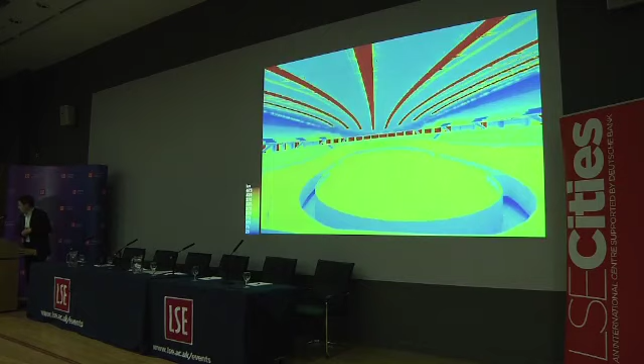We did lots of studies, and put roof lights in so you can cycle around that building with no lights on, so after the games it'd be very cheap to run. Manchester Velodrome costs over £200,000 a year to run.

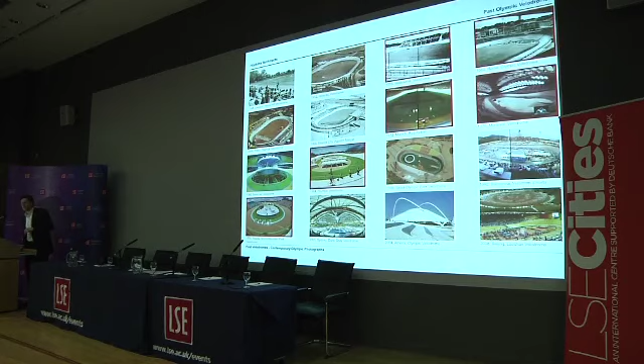So we look back to 1948. There is a velodrome in London, in Herne Hill. It's much bigger. I love this picture - it's 20,000 people standing outside. Definitely the most sustainable Olympics, whatever anyone says today. But importantly, a very nice connection between inside and outside.

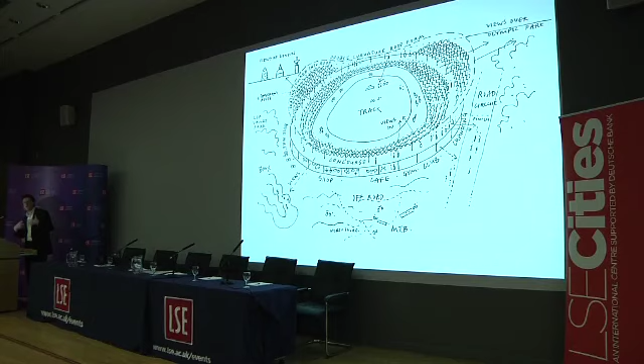So we actually started our project with this sketch, which was about inside and outside, about the park, about legacy, about getting people involved. We developed a section which split the seats, as I explained before, and had a ring of glass at low level, which allowed us to bring the park right up to that glass. I think for me, one of the most exciting things about the project was the idea a child in the East End could walk up to that glass, look in, still be in the park, and see the likes of Chris Hoy training inside.

It'd be fantastically exciting. So we've designed something which works in reverse, really. We designed this Velo Park, which has a 1-mile cycle circuit, 6.5 kilometres of mountain biking, a BMX course, and of course a track circuit in the middle. So afterwards, it's a fantastic resource for London, somewhere to go and cycle off the road.

And we worked very recently with the OPLC to refine this, fit it into the landscape. There's a movie which probably won't work now... Oh well. There was a movie showing it integrated into the park and how all the cycle circuits work.

It's all about teamwork, and we had a fantastic team on this. I think actually, no one's quite touched on it, but I think the whole process of building these buildings under an enormous amount of pressure has been a good testament really for the British construction industry. They've got it done, with a very good health and safety record, it's there.

And just finally, we're doing a small project - if anyone wants to help donate some money towards it, Herne Hill Velodrome, 1948. We thought the nice idea about legacy would be to help 1948 survive beyond 2012, and we were very concerned that a new velodrome would put the old one out of business. So the two should really work together, especially since the banking at Herne Hill is only 26 degrees. So if you want to ride, I'd go there first. Okay, thank you.

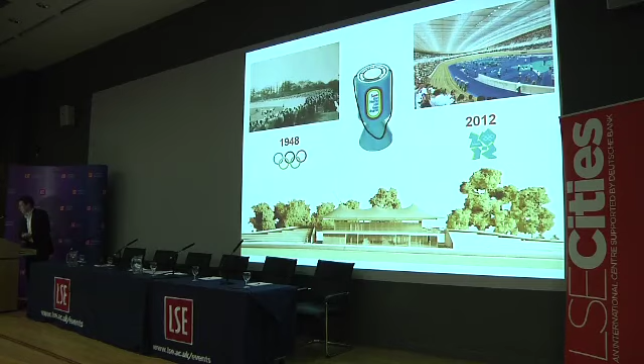I think we've just had from 3 architects a demonstration of the necessity of resilience on the part of architects working on these kinds of projects. Each of them referred to the need to design, redesign, and keep working at it, both to bring down costs and also to fit what was a slightly changing brief.

I think we've also seen evidence of a certain humour that keeps them going right the way through. When Jim Eyre shows a slide of the USA beating Britain at basketball, 52-49, you know that he's not lost his sense of humour throughout this.

But from the position of the ODA, there's another important lesson, for me at least: at the outset, we were faced with a choice at a time when everyone was talking about needing to do this within a budget and within a very short space of time. We were faced with a choice between using architects who had designed, as specialists, sports venues across the world, and inviting architects who had never designed one of these facilities.

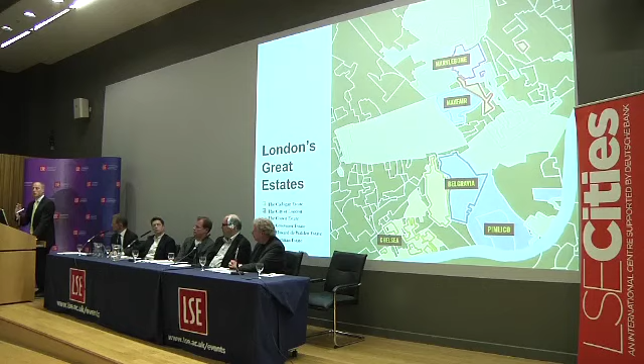They weren't in the center of the city as they are today, but were nurtured through the very conscious building of a city, through the quality of design, the quality of the space, and taking a 100-year view, not an immediate short-term view - not saying we have a fantastic Olympic Park, the games were great, pack up, job done, we delivered great venues, great games, and everything will now naturally happen. That could have very much been an attitude. One could say, we'll just take the master plan and sell off parcels, walk away, let it evolve naturally, leave it all to the market. One has to respect what the market can do, but also in context.

So another great legacy, and it sets up for the discussion, I believe that the Legacy Corporation, set up now as a mayoral development corporation, is equipped with the very tools that make great design happen, and that institutional architecture is having a company which owns the land, so it can act as a 21st century version of a great estate.

But a great estate in a different sense, not just a private great estate, but a public one, where the park will be held in public trust as open space, and the land can produce the quality of design and mixed income communities one wants to see. This creates a wonderful legacy for the city, taking a 100-year view, with a corporation here for 25, 30 years or more until that piece of city comes together and is integrated, just a piece of London.